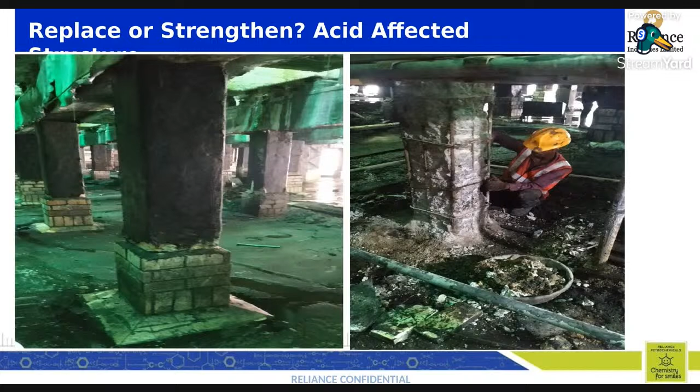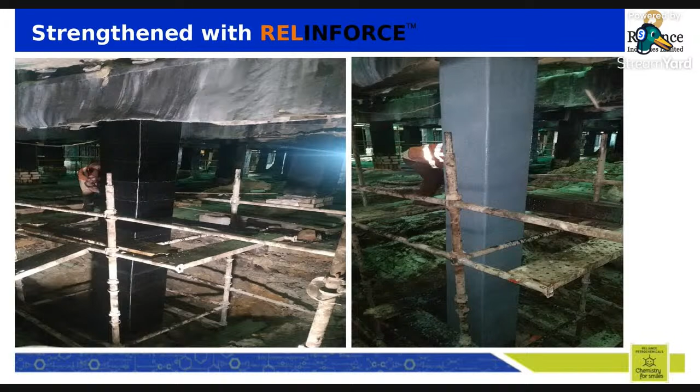So this is just to give an example. This is an acid affected structure, an industrial plant, a metal refinery where a lot of acid processing takes place. When we removed one of the columns which was covered with a protective coating, what we saw was that the concrete was crumbling and there was a reduction in the reinforcement as well, because acid leads to corrosion of the reinforcement and even the concrete started crumbling. So what we did was retrofit this particular column, and what you see here is the entire column retrofitted with a carbon composite. How it works, I'll try to explain in the subsequent slides, but this is what we can do. Instead of demolishing the entire plant and building a new one, we were able to retrofit this particular structure.

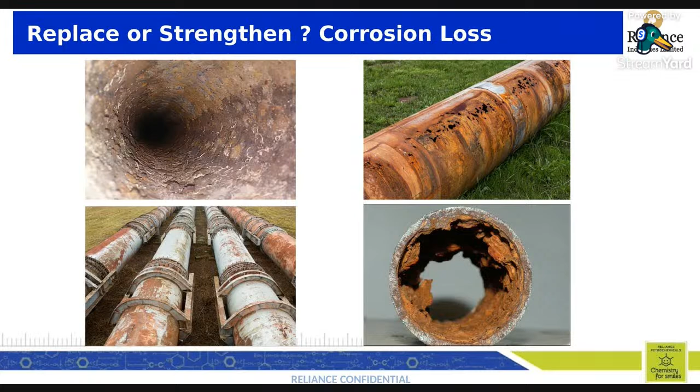Similarly, when you talk about metal pipelines used for cross country transportation of oil, chemicals, and even petroleum products, over a period of time it leads to corrosion and loss in thickness, which causes a reduction in the ability to withstand pressure. A similar pipeline was retrofitted during the process, so we did not have to stop the process line. Even during the process or manufacturing cycle, we were able to retrofit such a metal pipeline with carbon composite. Again, I'll explain how it happens.

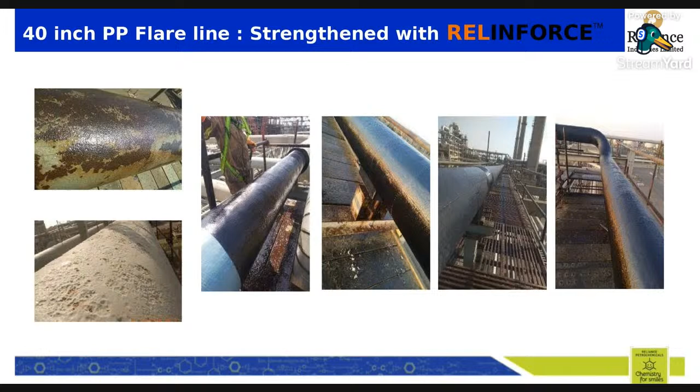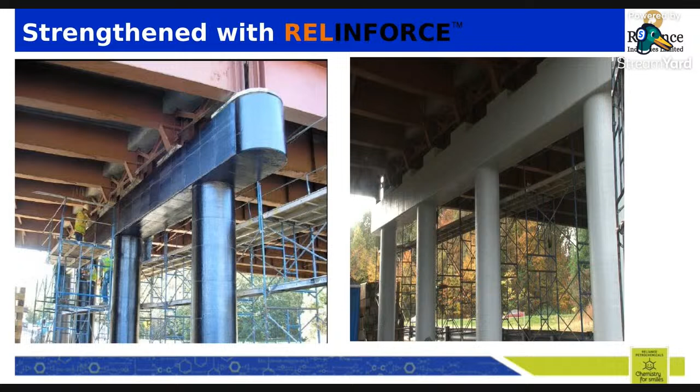Similarly, a bridge pier - you see the extent of corrosion in the structure - and we were able to retrofit it using a composite. So what we are emphasizing is how we can retain aging assets and make them suitable for current loading conditions. That is where carbon composite and the product line from Reliance by the name of RELINFORCE can be put to use. What is RELINFORCE? It's a range of carbon composites.

The reinforcing matrix is made out of carbon fiber, which is a high strength matrix. Carbon fiber, as you would know, is almost 10 times stronger than steel, Fe500. The carbon fiber we use has a tensile strength of 5000 MPa and a modulus of 250 GPa, so pretty high in strength. We have it in three forms: one is the fabric form, we also have pultrusion sections which we call carbon strips or laminates, and we also have it in the form of a grid. So wherever you have huge surface areas to be repaired, instead of going for a wire mesh or chicken mesh reinforcement, we can look at a non-corrosive carbon grid reinforcement for strengthening.

So a bridge deck, which has a huge area to be retrofitted, can have this carbon grid encapsulated into a cementitious matrix.

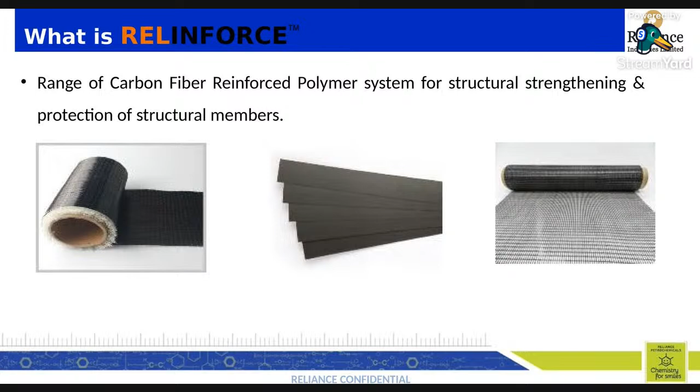How does it look? At a micro level, it's very similar to our reinforced concrete, RCC, where primarily steel is for tensile strength and concrete for compression. Same way, in this matrix, the carbon fiber, a high tensile material, is encapsulated into a reinforcing or binding matrix, which is generally an epoxy.

But depending upon the exposure conditions, this binding matrix can also be different resins - it can be phenolic, vinyl esters. Wherever we have highly chemical exposure conditions, we look at chemical resistant resin matrix as well. This is how it looks at a micro level, forming a very high strength matrix for retrofitting or strengthening.

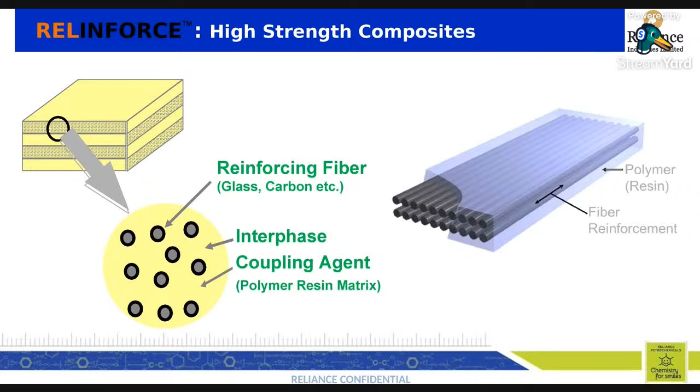What is its benefit? We have been able to achieve strength up to almost - this figure has further increased. Now we have a matrix that can give tensile strength up to 3000 MPa, still 6 times stronger than steel. At the same time, the weight of this matrix is 1/5 of steel.

So wherever the superstructure has deteriorated and we want to retrofit it, we can do it without increasing the dead weight of our structure. That is how it helps - it is highly light in weight, very easy to handle.

We have thermal compatibility up to 150 degrees. In industrial applications, sometimes this becomes an impediment because there are areas where temperature is higher than this, but in all other infrastructure structures, we don't face this issue.

It has excellent fatigue resistance, is very quick to install with very less manpower, helping bring the structure back to life very fast. They are also a non-corrosive reinforcing matrix.

So over a period of 20 years, when you see the life cycle cost, this proves to be economical. It doesn't require any further maintenance, and it comes in various options, giving the designer flexibility to work with different profiles depending upon what type of deficiency he is trying to address.

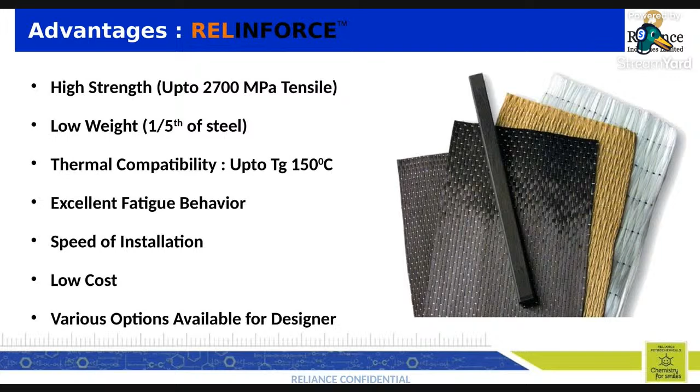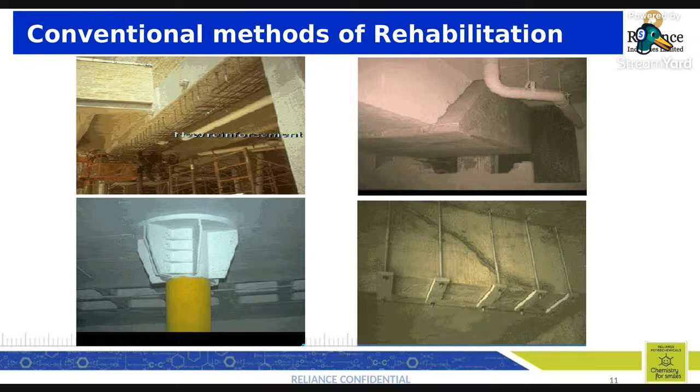What are the conventional ways of retrofitting? We have jacketing, steel pinning, and external columns being given to retrofit the structures - these are all very cumbersome and time consuming, and also cause problems to the operational efficiency of the structure.

If you compare it, these conventional methods are very bulky in nature and increase the dead weight. So wherever you don't have scope for strengthening the foundation, and you just have to retrofit the superstructure, and you're not very sure how good your foundation is, it's not possible to increase the dead weight of your superstructure by way of strengthening. That is where it becomes a problem.

It requires a lot of artful detailing in terms of where the shear connectors have to be given, how much reinforcement has to be given - so it requires a lot of skill and is pretty time consuming. And it doesn't stop there, because ultimately it is again the normal steel and cement being used for retrofitting - it doesn't stop any further deterioration, the root cause for which the structure underwent a reduction in strength.

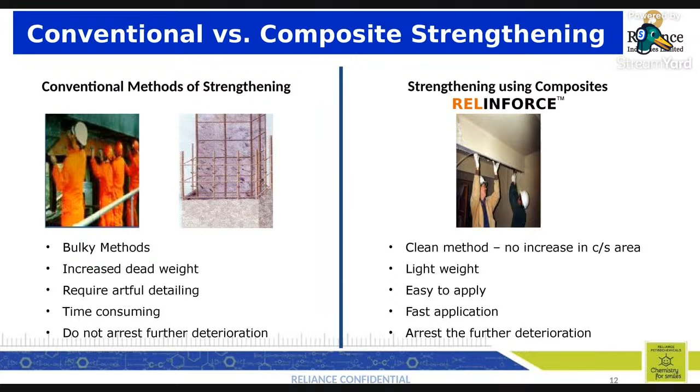Vis-a-vis that, when you talk about CFRP, it is pretty clean, very neat to apply, light in weight, easy to apply, very fast in application. And carbon fiber is non-corrosive in nature, so it doesn't cause any further corrosion - it makes your structure maintenance free.

What is the design philosophy? When we talk about concrete structures, globally ACI 440 is the code followed to retrofit concrete using CFRP. What we do is try to get the details of the original structure, and depending upon the deficiency of that structure, we look at various types of strengthening - right from flexural, shear, axial loading enhancement, even seismic retrofitting.

You might have heard about what happened in Turkey, right? We have a lot of structures that were built before 2001, when our seismic codes also got revised.

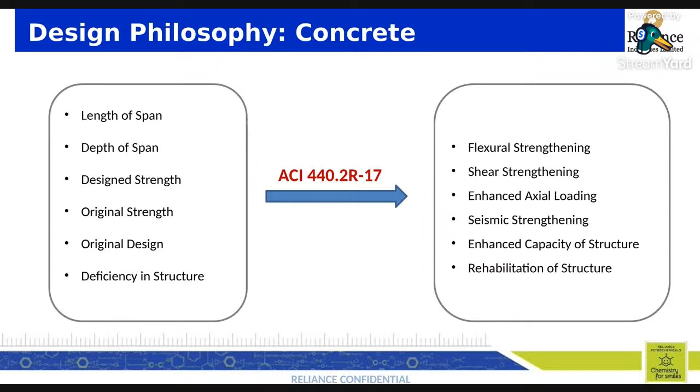So even seismic retrofitting can be done with CFRP. We can also enhance capacity. We come across areas where the structure was designed for a different use, but due to certain conditions it is now expected to take very different loading conditions, which requires enhancing the capacity. That too can be done. Wherever we have old structures which have undergone deterioration due to corrosion, that can be rehabilitated.

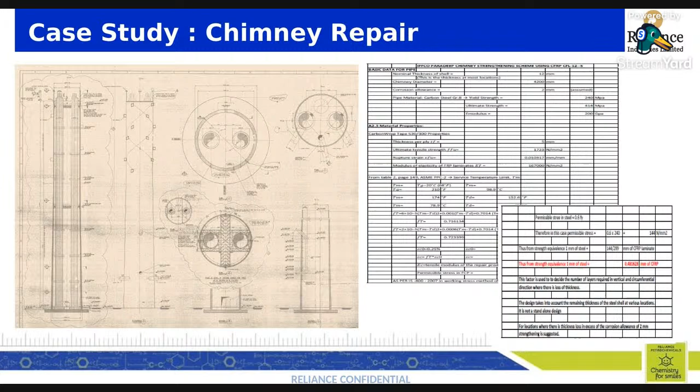We have done even 150-meter tall chimneys. We have a design team which works on the calculations for the customers. So all the retrofitting schemes we provide to clients carry all the calculation sheets, making it pretty simple for them to understand, and the client's design team can also verify the calculations we have done.

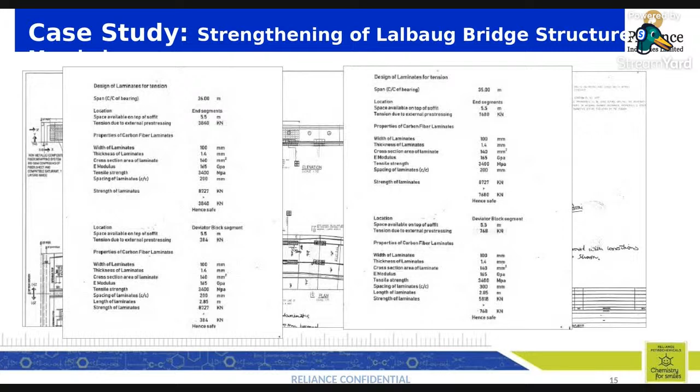Since everyone knows about the Lalbaug Ganpati, there's a long bridge there. We also did the retrofitting of that Lalbaug bridge in Mumbai, where the box girders were retrofitted using CFRP. These are the calculation sheets which accompanied the work.

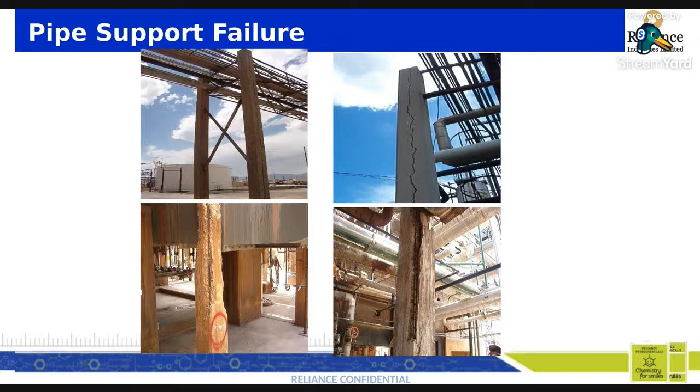Now we also do beam retrofitting. You also have pipe rack columns in a typical industrial structure, where you have a lot of columns which support the pipe racks that go all along the plant. We had also retrofitted such types of structures.

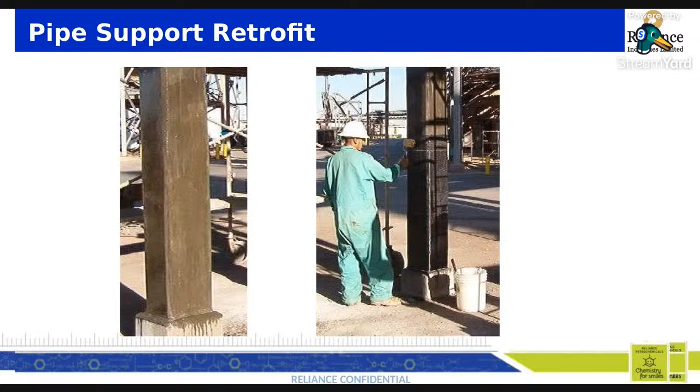What you see here is the axial loading capacity of the column was increased by virtue of the confinement process. This is how confinement happens for a column. This is generally done when you want to increase the axial loading capacity of a column.

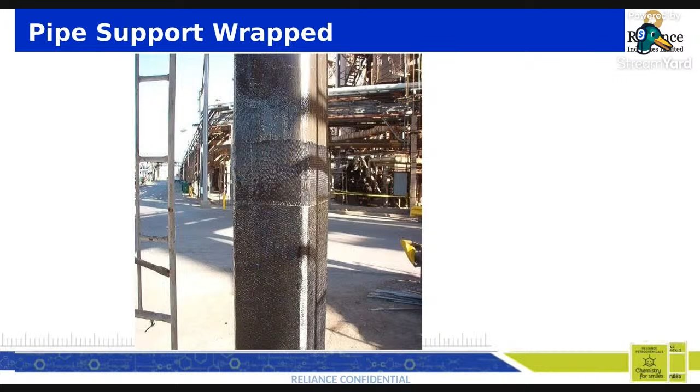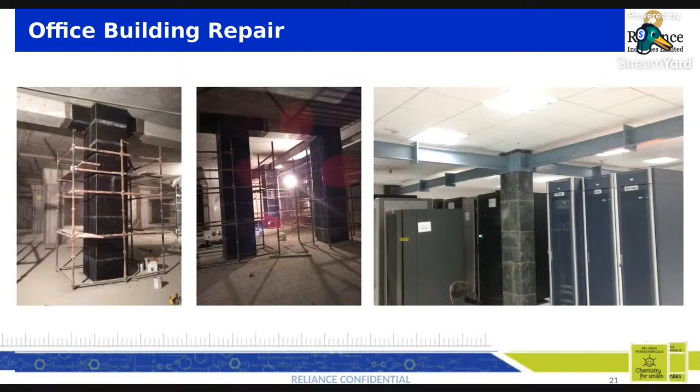We also do seismic retrofitting along with axial loading enhancement. So what you see here is a combination of seismic retrofitting and enhancing the loading capacity of your column.

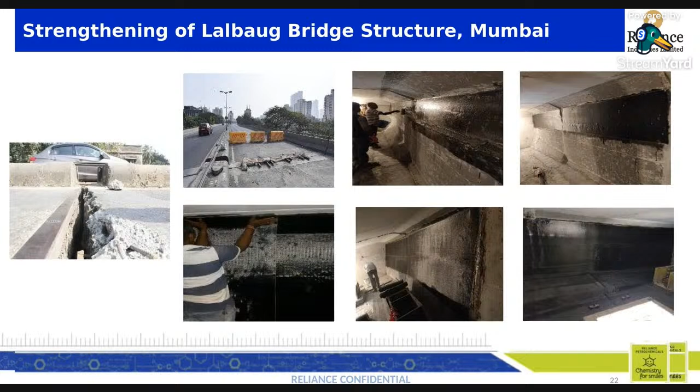This is the actual on-site photograph of the Lalbaug Bridge. What you see here is people working inside the box girder. So all along the length, laminates were introduced, and at the junctions, fabric was installed.

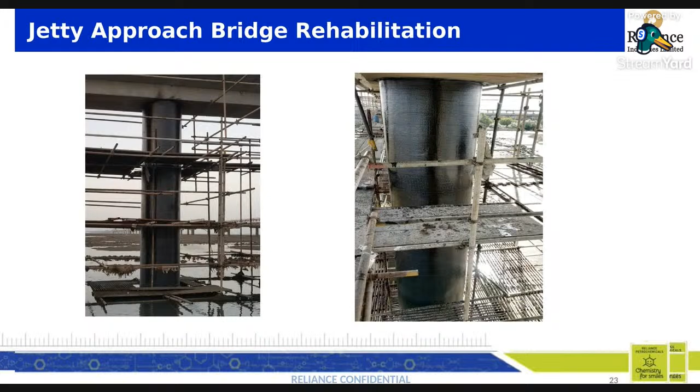It doesn't increase the section of your pier or structure, and at the same time it makes it very neat and clean. It becomes very quick to install, and the matrix or epoxy binding material used was moisture insensitive, so it doesn't get affected by moisture conditions.

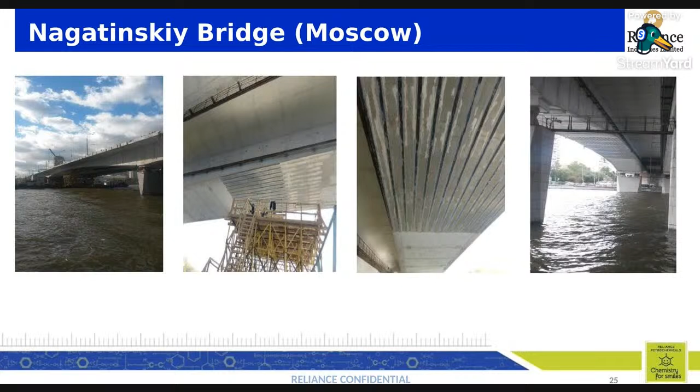This is again a bridge in Moscow, where at the flexural portion, laminates were introduced. These are strips introduced all along the length of the bridge to support it in flexural efficiency. Again, what you see here is the shear reinforcement done at the junctions of the I-section girder.

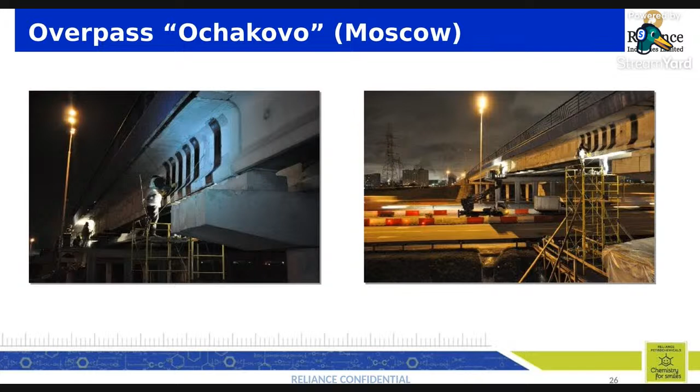Different types of strengthening schemes, depending upon the deficiency of the structure, can be taken up using CFRP. This was one bridge which was decided to be completely demolished to construct a new one, but they were able to retain this entire bridge by retrofitting it with CFRP.

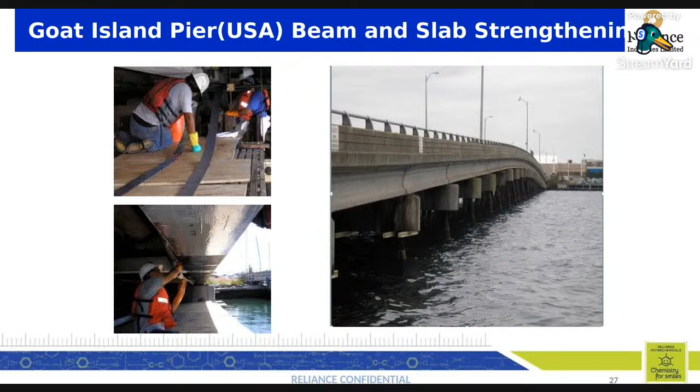So as young engineers, when you move out in the market and start your journey, when you come across such problems, you can look at various advanced solutions to retain the structure, which will also in turn help in retaining our resources. Probably those resources can be used for building assets in areas where we don't have such structures.

Now, I also showed you the metal pipelines, right? So even in industrial structures, you'll come across a lot of metal structures which undergo corrosion because of the ambient conditions there. Now, for metal, as in concrete, we go with ACI 440.

In metal structures, the design codal provision adopted is the ASME PCC2. For pipelines, we look at withstanding the pressure which the pipeline has to take. So we talk about a standalone pressure design where there is a complete hole in a metal structure, and the CFRP composite is expected to withstand the entire pressure. We also look at a deflection control design for long pipelines where the supports are at a longer distance, and we need to look at the deflection control.

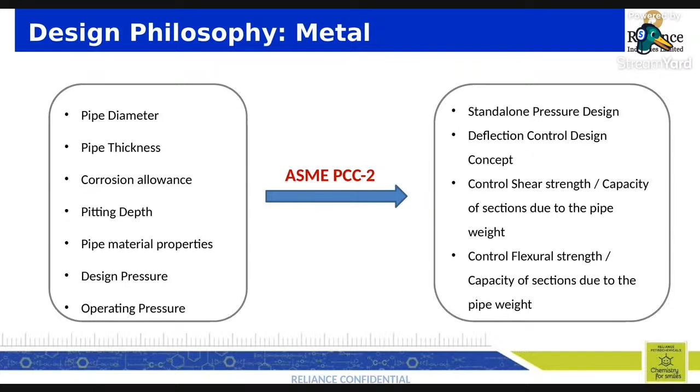Even the shear strength, I'll show you a couple of photographs. Here also, we support the customers with a calculation sheet, which substantiates the basis on which the retrofitting scheme is designed.

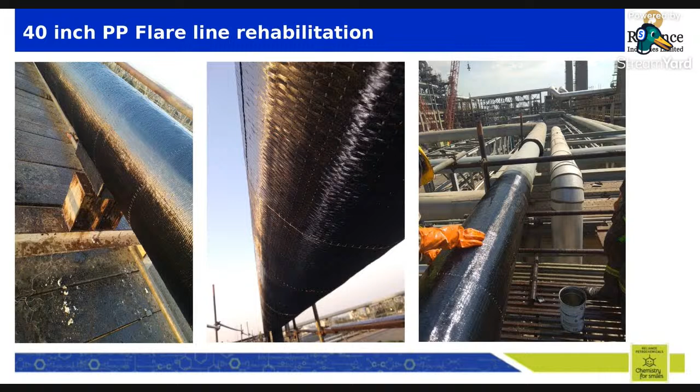This is a 40-inch PP flare line done within our own Jamnagar refinery, where due to pitting corrosion there was a reduction in strength at various places. This is purely cold work. In industry, the client is not ready to stop its process because it leads to loss in revenue, so they look at options which are cold work and don't require stopping the process line. This is one technology which can be worked upon even when the pipeline is in process or manufacturing, without hampering it.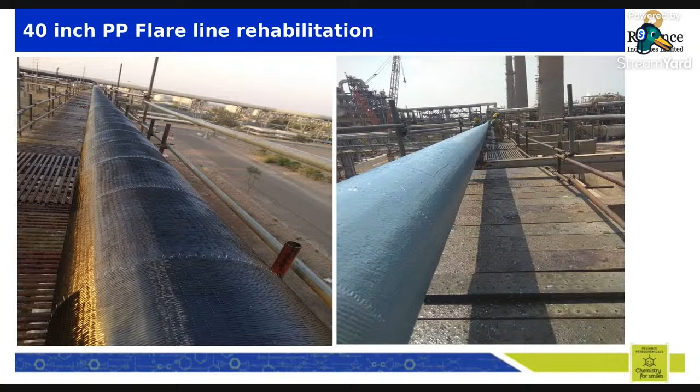This is how it looks - a 150-meter long length completely retrofitted with CFRP and then finally coated with a UV stable top coat.

Now with 2 or 3 people, you can retrofit the pipeline at areas where there is thickness loss. In pipelines, there is a process called pigging, where a machine runs right inside the pipeline along its length and identifies precisely the points where there is a loss in thickness. The client digs out the pipeline at that particular portion, exposes it, and that area is retrofitted with CFRP. This becomes very handy for such non-accessible structures.

Once you do this, they are rest assured about its life. Similarly, for industrial assets, as I showed you the overseas infrastructure, these were jobs which our technology partners did.

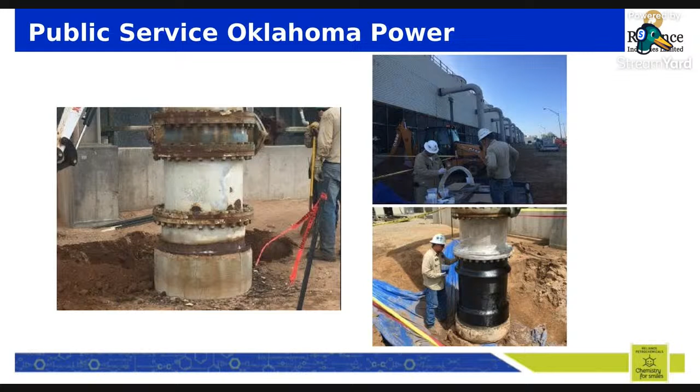This is something in a power plant where you see a header line which had a lot of corrosion patches. If you want to stop the process line, it causes a lot of operational losses. Even during operation, it was retrofitted with CFRP, purely with a fabric. Similarly, even steel process lines can be retrofitted with laminates or fabric.

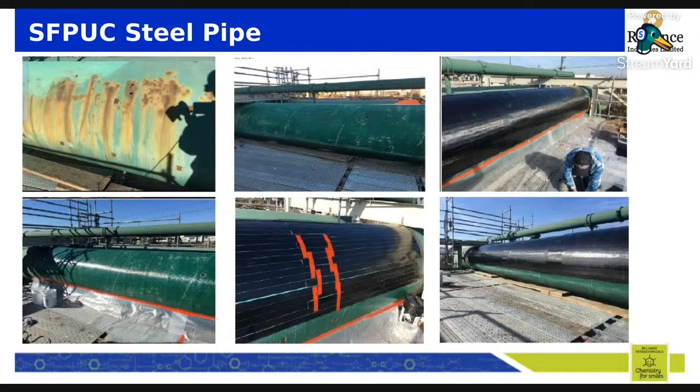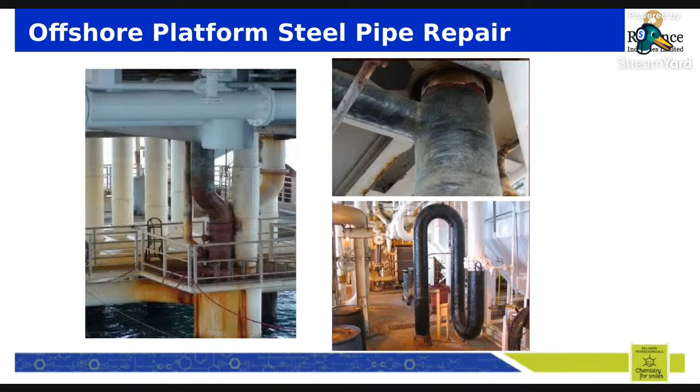Again, an offshore platform where you see the portion retrofitted with CFRP. Instead of completely replacing this or stopping the process, while it is in process we get it retrofitted. In some portions we just look at augmenting the thickness wherever loss has taken place, and in some cases we also look at standalone pressure design. Here you see there is a complete hole because of corrosion, so here we have to stop the process line and completely retrofit it. The matrix is expected to withstand the entire pressure which builds up in the process line.

As I was mentioning, it works on 2 principles: one is a standalone pressure design, and second is where you have support from the existing metal substrate, where there is a thickness loss and we want to augment that thickness with CFRP. PCC2 outlines how for these 2 approaches the thickness of a CFRP has to be determined. So that's how we do it.

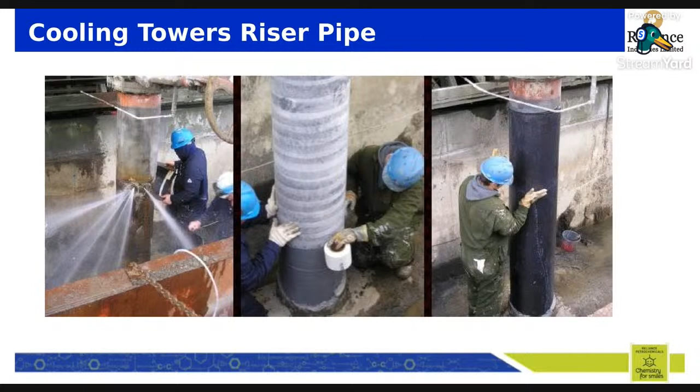Coming to now, if similarly a hole which has happened in this type of process line, again that can be retrofitted in a completely non-destructive way.

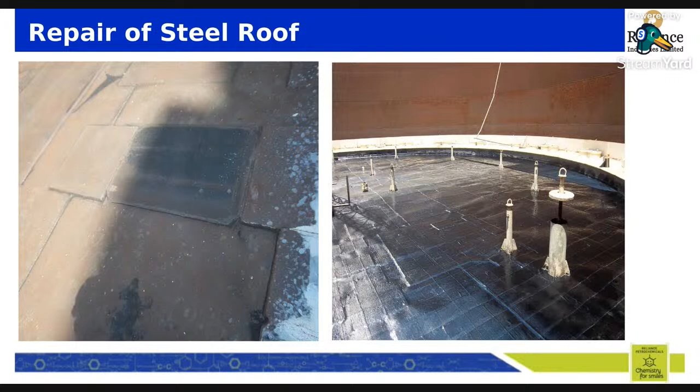Similarly, in petrochemical plants, you will come across tank roofs where they store petrochemical materials, and certain of these materials are very corrosive in nature. This leads to corrosion of the metal roof. Now, to change the entire metal roof is a big headache and a long drawn process. Instead, this entire metal roof was retrofitted with CFRP, so the high strength property of the CFRP comes to very good use in such applications.

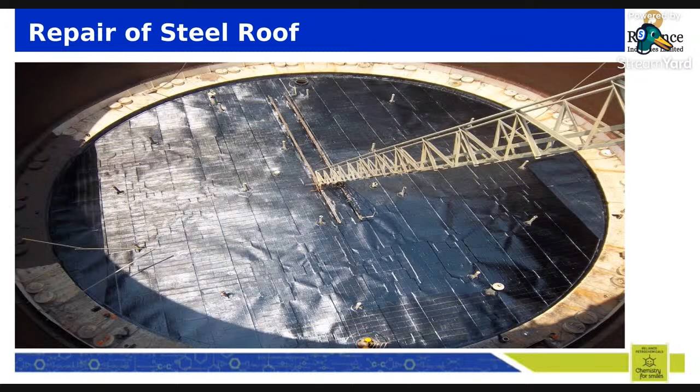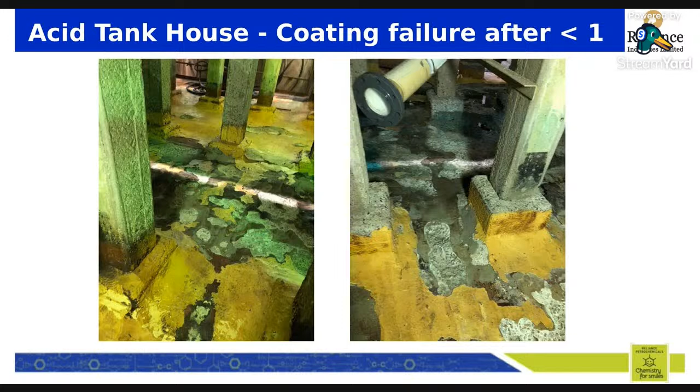What other applications? We also look at acid resistance applications, because composites have a very strong background in material chemistries. So we also look at retrofitting areas exposed to very corrosive chemical exposures, using the high-end chemistries we have. Like we have a chemical sump area, so this can be retrofitted.

Now in industrial plants you'll come across a lot of effluent plants made out of concrete, and since they have a lot of acidic exposure conditions, they come for repair every now and then. So we look at retrofitting those structures with chemical resistant coating systems.

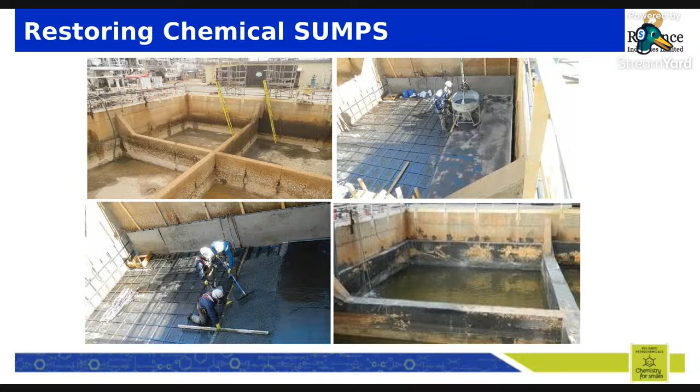So just to conclude on what benefit RELINFORCE brings to the table: one is additional strength. We also look at corrosion protection. We increase the ductility of the structure, so in areas where you want to make the structure more ductile, we can do it using the CFRP.

Very versatile. You have come across various photographs where different types of structures were able to be retrofitted using CFRP. Being light in weight, it is very easy to apply, and with minimal manpower, non-accessible areas can also be retrofitted. It reduces the life cycle cost, because CFRP is non-corrosive, and if you use the right binding matrix, it enhances the life of your structure, because that matrix is able to withstand the exposure conditions for which it is designed, avoiding any future maintenance.

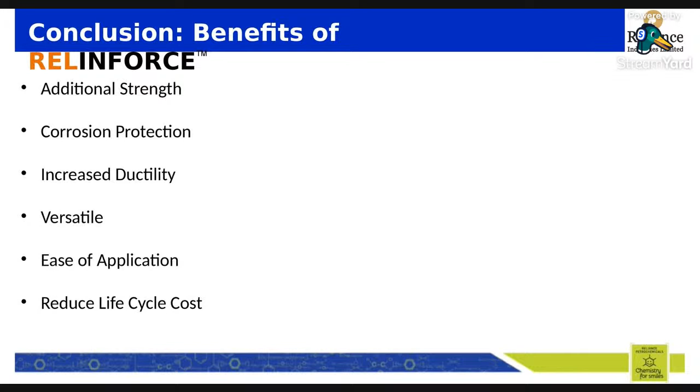Just to give a glimpse of why RELINFORCE, or why this product from Reliance: the entire design, right from designing the system to the materials we use, is made within the Reliance premises. We also support our clients with installers. There are properly trained installers who are able to install this material with the right quality and give the right deliverables for the customers. That is where we give an end-to-end offering to the clients.

We have our own in-house resin manufacturing, and even the carbon and glass fabric we make is made in-house by Reliance.

To give tailor-made solutions for our customers, we have an application development center within our premises where a team of scientists works on different resin chemistries. Apart from infrastructure, where the exposure conditions are not very severe, when you come to industrial applications, you come across a lot of varied and severe exposure conditions, and a standard product line generally doesn't work. That is where this application development center provides a tailor-made solution for the customer.

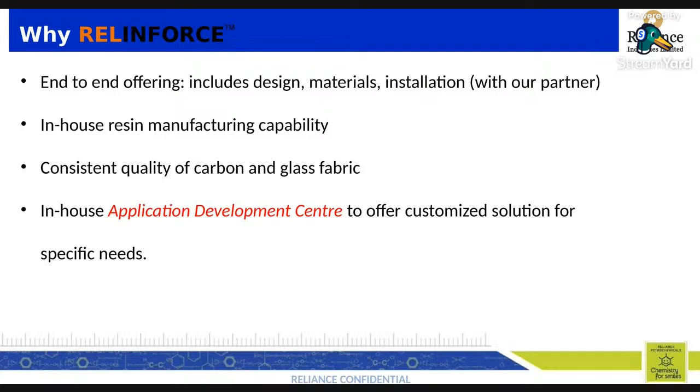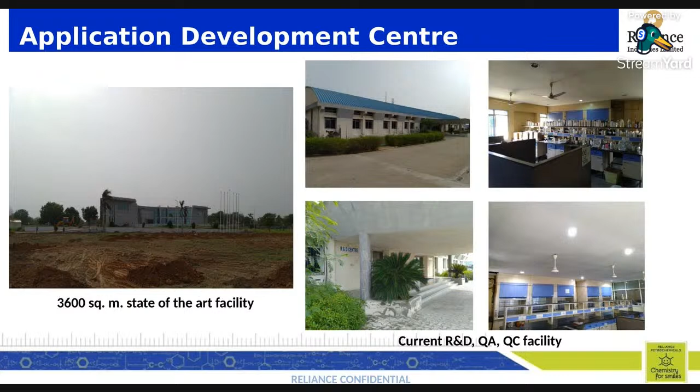This is the development center we have within our composite manufacturing plant in Baroda, where the team of scientists works on developing different types of resins for different conditions. Since this application goes for developing a structural matrix, they also go through a lot of analytical testing, where not only the carbon fiber and the resin standalone, but the composite as a matrix is also tested for various mechanical and chemical properties. This is what is done in this facility.

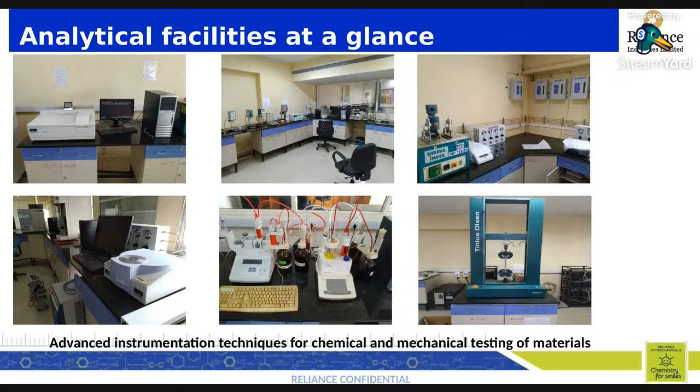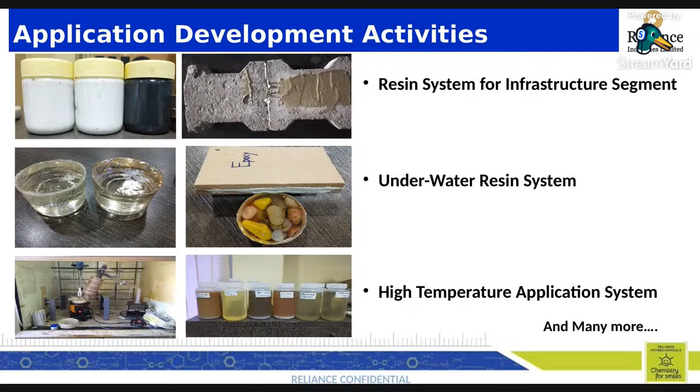Based on that, we have been able to successfully develop a lot of products which till the recent past were imported in India. So we have resins, we have underwater resins which get cured even underwater, and we have been doing a lot of underwater applications. We have also been doing high temperature applications where generally resins are not able to resist beyond 90 degrees, but we have been able to do applications which go even up to 200 to 250 degrees. We have been able to provide such solutions only because of the application development center we have.

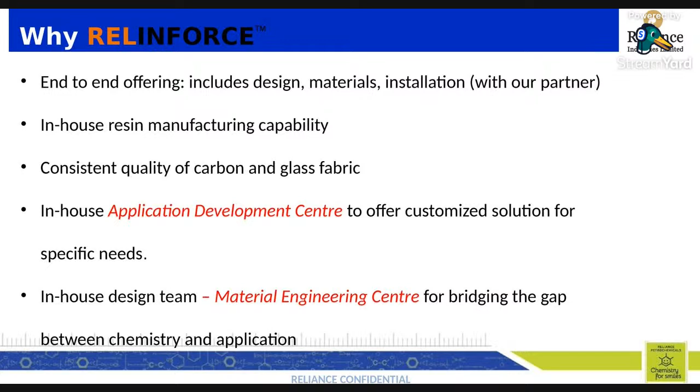Second is the in-house design team. We have a material engineering center, MEC, based out of Mumbai, where there is a full-fledged design team who works on composite designs. It's not only that we look at infrastructure or CFRP, but we also look at various other applications using composites. This MEC works on using the materials developed by ADC, and using those properties, they design various solutions that RELINFORCE offers. So MEC works on bridging the gap between material science and the final applications.

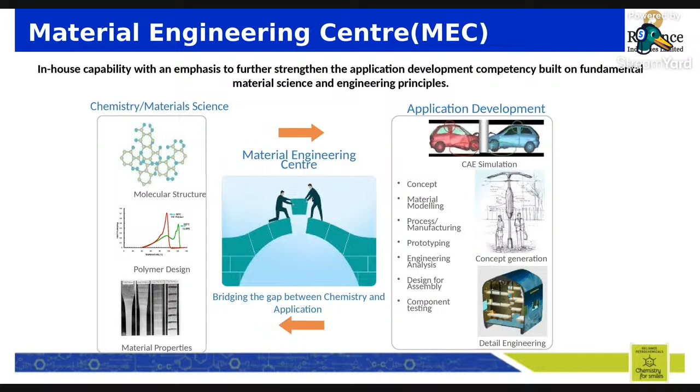So as I was saying, it is not only the infrastructure retrofitting that we do, but we also make windmill blades, manufacture metro bodies out of composites, and make cooling tower profiles out of composites. Nowadays, all the power plants' induced draft cooling towers that you see are made out of composites, and we have a major share in that market. That was all possible because of MEC. They were able to design this using composites. So that is what we do.

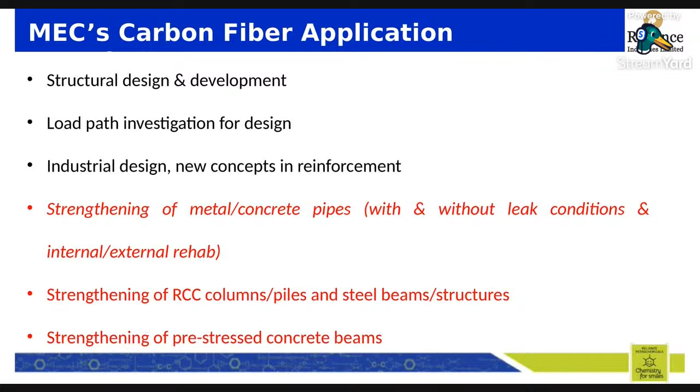Just to talk about what MEC does for this particular application: we do the structural design and development. They look at the load path investigation for design. They make industrial design and new concepts, which ultimately helps us retrofit metal and concrete pipes. We also look at strengthening RCC columns and piles, steel beams and structures, and pre-stressed concrete beams. So this is what we do with the help of MEC and ADC.

This is what Reliance Composite division is all about, from where this product line comes out in the market. We have almost 9 operating divisions: a technical fabric division where carbon fiber is converted into a fabric, a resin plant where we manufacture different types of resins, and the carbon pultrusion strips you saw, which are made using a pultrusion process where the fiber goes through a heating process and is converted into a strip. Then we have a fabrication yard where we also make tailor-made solutions for our industrial applications.

Through filament winding, we make underground fuel storage tanks out of composites. Nowadays, all the petrol pumps you see have their fuel storage tanks underground. Earlier, these were all made out of metal; nowadays, they are all made out of composites.

We also have a mass transport division where today we make metro coaches for 3 metro companies in India: Mumbai Metro, Pune Metro, and Agra Kanpur. All 3 metro companies today get their metro coaches made in our plant, and we are today making 62.5 meter blades out of the wind blade division in RCS. So this is all what we offer.

One of the offerings I discussed today was for civil applications. Each of these divisions offers solutions for different varied industries. This is probably the only organization where all these composite processing facilities are under one roof. We have a complete back-to-back know-how and processing facility within one roof to give solutions which are pretty tailor-made.

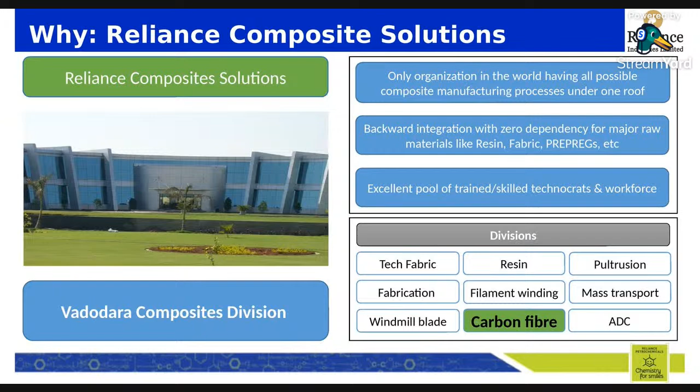Thank you, I hope the information was pretty useful. It's an integrated facility. As I mentioned, we have end-to-end capability, right from design to material to parts, and we look at offering application and solution-based offerings to the customers. Hope it was pretty useful.